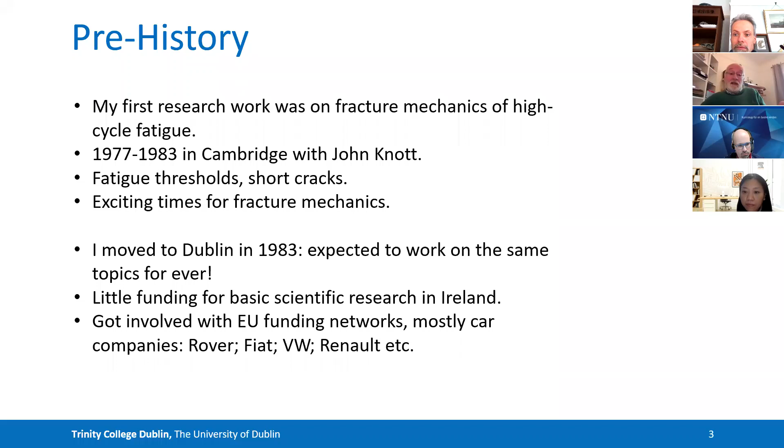I did that at the time simply because it was the only way of getting on, of buying some equipment and getting started in my academic career. But it turned out to be, fortunately, a very good thing, because the big topic those companies were concerned about at the time was notch fatigue, meaning fatigue arising from stress concentration features.

You have a picture of a crankshaft there, for example, a classic problem with cracks growing from the corners. When I first started talking to these companies, they wanted me to study this and understand it better, but it wasn't really expected that we would be able to use finite element analysis. Even when we were applying for funding in the 1980s, we didn't even talk about FEA, because though we were using it in universities, the companies believed it would never be possible to make a finite element model of something like this crankshaft — just too big and too complicated, too many elements.

Of course, we all know that turned out to be wrong, because ten years later, by the 1990s, all the companies were using them. But we could never have known how fast computing would come along.

But when they did start using them, this illustrates the problem: you make a finite element model and you see the contour plot on the left, you've got that little red area, that hot spot. Very often when they first made these finite element models, the stresses they were predicting were so large as to be really impossible — they were calling me up saying, look, we've got stresses here larger than the yield strength, even larger than the UTS of the material sometimes.

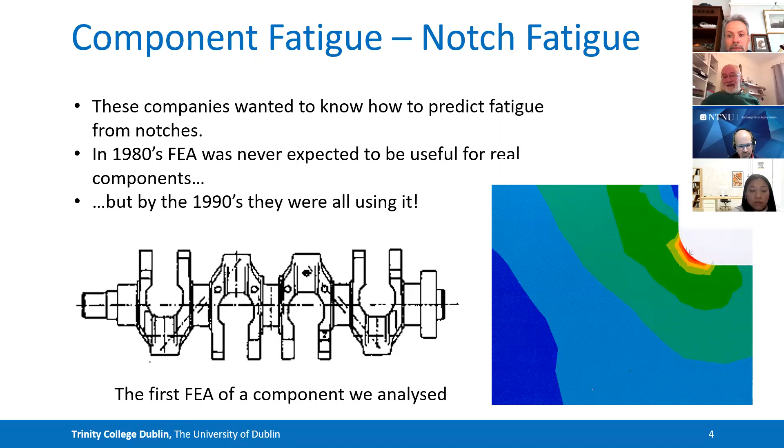So I started working with these companies, and that was very useful because it put me in front of real problems and all the complexities of geometry and loading, which makes the problem much more difficult than that of a simple notched specimen.

You can't even really define a KT factor for a shape like this wishbone you can see on the screen. So there was a need to formulate the problem in a more general way, so it could be attacked from the point of view of post-processing finite element data. Lots and lots of data, of course, from an FEA, but how to interpret that, given that all we know up to now is what happens with notched specimens in the laboratory.

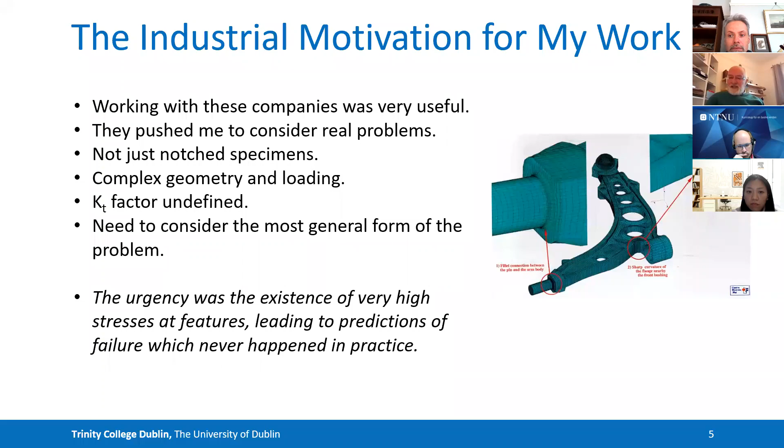There was a great urgency about this, because these companies would love to use finite element analysis, but they didn't trust it, since they were getting these strange hotspot stresses coming up.

Through the 1990s, I was working on these EU network projects. Now, the projects generally were not about notch fatigue. Certainly the money I was getting as a partner in those projects was for doing other things, for example looking at the fatigue of spot welds and things like that. But because it was emerging that notch fatigue was the problem, we took on researchers and did work in that area, even though it wasn't really in the plan, and it was not what the EU were paying for, shall we say.

I also started to get funding from the Irish government. At the time, the Irish government didn't have much money — they only wanted to use it to stimulate industry in the country. Their view was that there were two big things they wanted to encourage: one was IT, computing, and the other was biotechnology. So the only things Irish scientists could apply for money in were those two areas, and I wasn't working in either of those.

Except, I said, all right, this finite element modeling has something to do with it. So I proposed and got funding for quite a few years in the IT stream by saying I was going to develop a computer program to predict fatigue using these notch fatigue ideas. I never did, but I argued that I had to do some practical experiments first in order to get the data to put into the program — and that lasted for quite a long time.

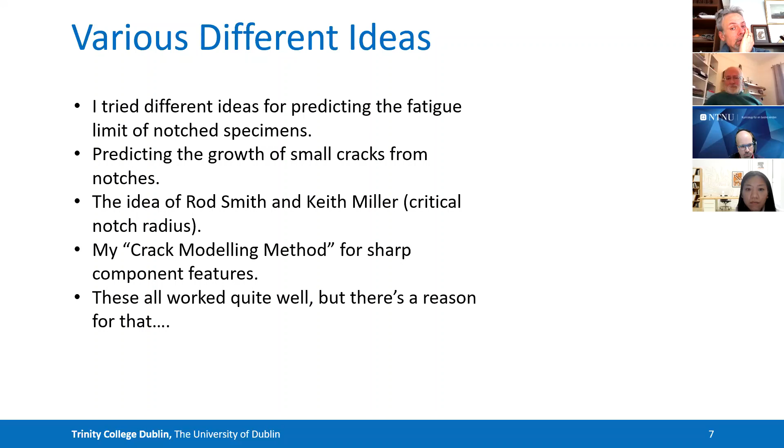But there's a reason for that, and notches are easy. I say that because if your problem is to predict fatigue from a notched specimen - very crudely drawn here by me - the notched specimen only has a few parameters: a depth and a root radius, those are the two main ones. It also has an opening angle, but that only really affects the stresses if the angle is quite large. There's also a remaining section, which is rare - important in some cases, but not often. So really you've only got the depth and the radius.

So it's not too difficult, looking at this cynically, to propose an equation with a couple of constants in it, and fiddle with the equation until it predicts the results from these experiments, because you've only got two variables - depth and radius. So any reasonable theory, any sensible theory that occurs to you, is probably going to work and predict the data reasonably well.

I think we still see this a lot in the literature - people say, 'I have a theory about notch fatigue or notch fracture, here are my results, and I can predict the effect of notch depth or notch radius.' But you have to ask yourself, are you being ambitious enough in what you're trying to predict? You should try to predict a bigger range of stress concentrations, ideally also some real industrial problems, if you want to show your idea works.

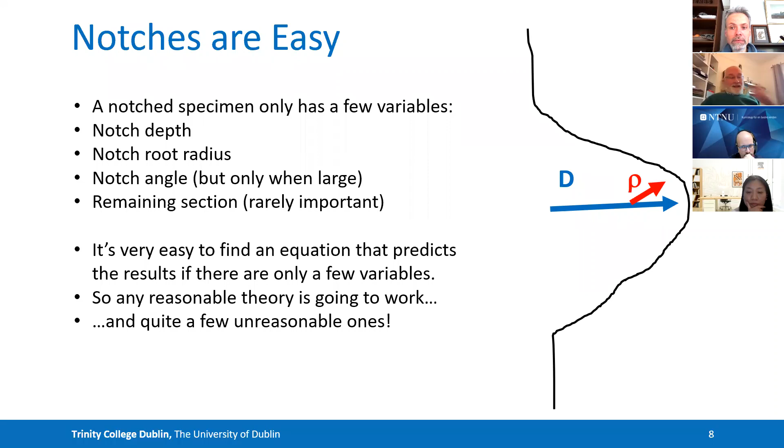Going on to the first paper I wrote about the TCD - I wasn't calling it TCD at the time - this paper was 'Geometrical Effects in Fatigue: A Unifying Theoretical Model.' I actually wanted the first title to be 'A Unified Theoretical Model,' but the reviewers didn't like that - they thought 'unified theory' was too ambitious, so I had to put 'unifying theory.' That shows how you play around with words when arguing with reviewers.

This was my first paper in the International Journal of Fatigue, and it came about because I was playing around with some data I found in the literature - a paper from Tim Topper's group, DuQuesnay et al. This is some of their data on the right, looking at the effect of crack length on fatigue limit - very classic, what we now call Kitagawa diagram stuff.

I noticed that this curved data line could be predicted reasonably well using the stress moving away from the hot spot near the crack, just using the stress at some distance away from the hot spot, which I was calling A0 at the time - we now call it L. Noticing that at half of that distance, A0 over 2, if you look at the stress at that point and let it equal the fatigue limit of the material, you can immediately plot this data. You have to remember to use the full and proper equation for the crack, the Westergaard equation. But if you do that, it works. There are a few other ways of doing it too - averaging the stress over a larger distance, 2A0, or looking at the stress averaged over that area I've drawn there.

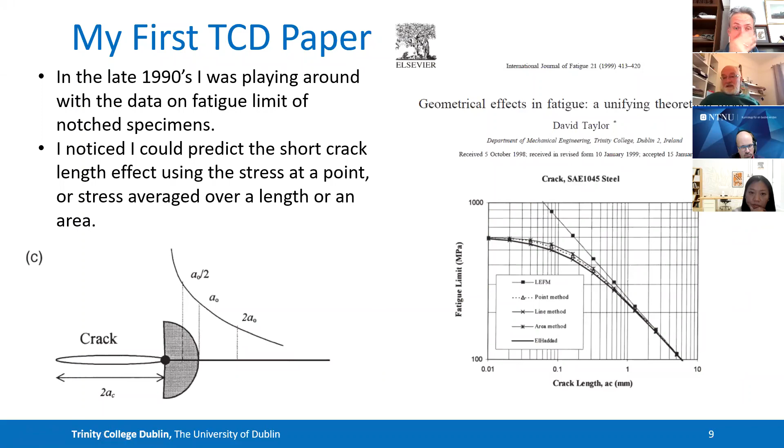But anyway, I played around with this and thought, well, this is nice. This seems to predict these results quite accurately. But that was just for short cracks.

And I noticed also that constant A0 is the same constant as that group was proposing, and they were calling it El-Haddad's method. There was another paper by El-Haddad, Smith, and Topper at the time, where they had made predictions by introducing an imaginary crack, and the length of that crack was also A0. So in my mind, things were kind of tying up.

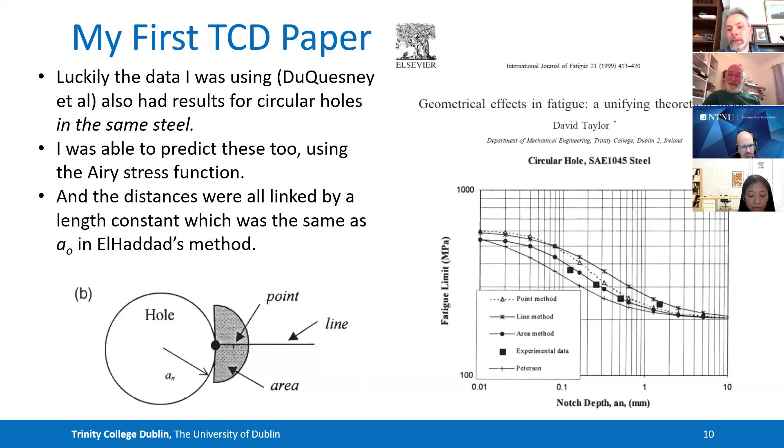You get to a point where you say, this can't be a coincidence, there must be something fundamentally going on underneath all this that makes these different methods of prediction all be working.

Now, it was quite difficult to get that paper published, I must admit. I thought it was a good paper, and I was submitting it to several good journals, but the journals were rejecting it. Some of the reviewers were saying, oh, this stuff is all very obvious and well known, and I'll come back to that in a minute, but they weren't actually quoting me any previous papers that had done this same thing, but they were saying, oh, it's all obvious.

Whereas other reviewers were saying it was all wrong and theoretically incorrect and couldn't possibly work. Two very conflicting views, you might think, and sometimes I got those two views from two reviewers from the same journal, so obviously something strange going on there.

But anyway, eventually I did get it published, and thank you to the International Journal of Fatigue for publishing it. But I think I have the last laugh, because I just checked recently, and that paper has 494 citations to it, which is actually the 6th highest for any paper ever published in the International Journal of Fatigue. So in the whole history of that journal, it's the 6th best paper that they've ever published. So thank you for that.

But I think we all have those experiences sometimes, some work that we know is good, but we just find it difficult to convince others. But it's worth pursuing it and sending it to more and more journals until you get it out there, I think.

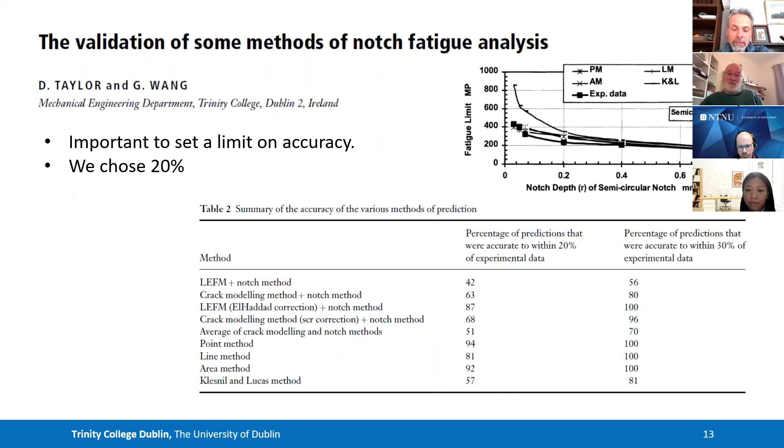So that was our first attempt to really be systematic, look at all the data we could possibly find and ignore nothing, and try and predict everything. And it was working pretty well.

But it was a nice illustration about why you need a critical distance approach, or some kind of approach that's, as we say, non-local, that doesn't just look at the hotspot stress. Because not only can you get the numbers wrong, you can even predict the wrong place for failure.

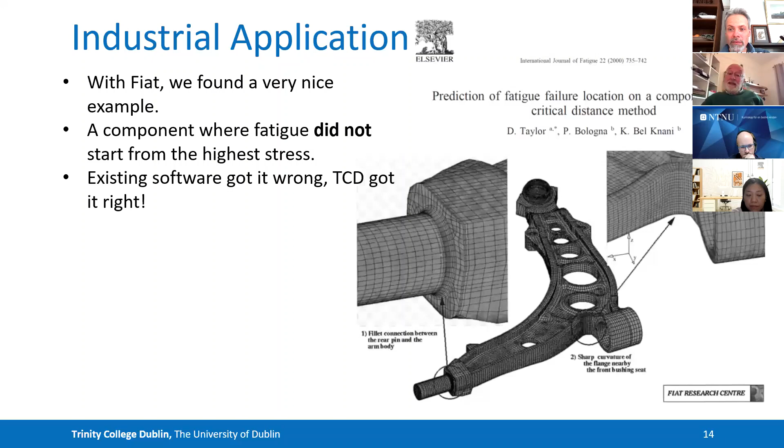So that was a nice practical example. The other thing we were working on, apart from looking at data and trying to predict it, looking at industrial problems and trying to predict those, the other strand was to try and look at the mechanism.

This is another fundamental thing about science: if you have a theory, you may well be able to predict the phenomena with that theory without really understanding why it works. These purely phenomenological models are very common, and we use them in science and engineering all the time. We use Young's modulus to predict the stress from the strain, or the strain from the stress, without worrying too much about why stress and strain are proportional. Maybe we know the science, and you could go back to the fundamental mechanism of atomic bonding, but you don't—you just plug it into the equation. There are lots of equations like that we use.

But people are more comfortable with a theory, with a model, especially if it's a new one, if they can understand why it works in terms of the underlying physical mechanisms. Now, to be honest, this has always been a problem with the TCD theory—it's not easy to explain why it works and why such a simple theory works. But I started doing that in 2001, and we've been plugging away at that ever since.

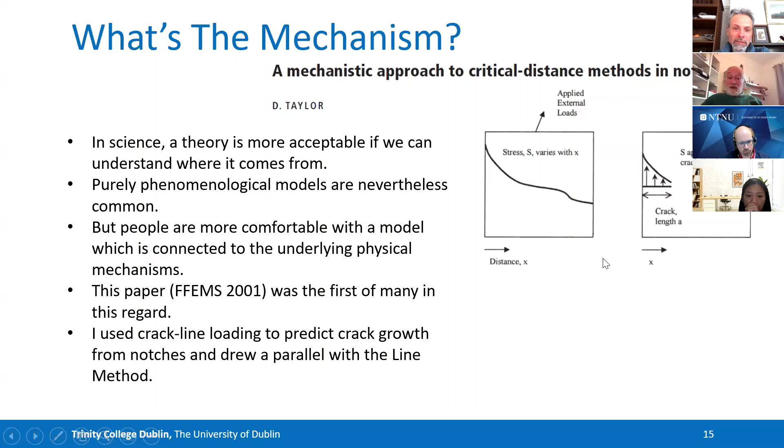This particular paper, published in the Fatigue and Fracture of Engineering Materials and Structures journal, used that method you may be familiar with called crack line loading for predicting stress intensities of cracks. The argument is you have a body with a stress in it, and you want to know if a crack's going to go through it. If you put a crack in, you can predict the stress intensity of that crack by looking at the loads applied across it, or making an analogy between the actual external applied loads and a series of point loads representing that stress gradient. By doing that, I could make an analogy between that and the line average method of the critical distance theory. We won't go into the details, but we were starting to ask ourselves: why does this work?

Okay, going on to the next slide. So where are we so far in the story? It's now 2001. I've been working on this critical distance idea for about 3-4 years. I've had an idea, I've shown that it predicts a lot of data, that it has some industrial applications, and maybe can be linked to physical mechanisms.

Now, what I didn't know at that point was this had all been done before. Many of you are familiar with the fact that these ideas like the point method and the line method go way back to the 1930s when Neuber and Peterson were proposing them. It had been looked at by several people in the Italian group, such as Bruno Atzori's group and Roberto Tovo. These papers are there in the literature. Professor Tanaka in Japan made the same link as I did between the stress averaging methods and the linear elastic fracture mechanics methods. So it's all kind of there.

Now, I'm not going to start talking about what I did that was new and different—I'll leave that to you to decide what I did versus what other people did. But the moral of the story for me is: don't read the literature. Because if I'd been very careful and read the literature and informed myself about what was already being done in all these papers, I probably would never have continued down this road, because I would have said, oh, this has all been done before, we won't go there. So don't read the literature is the advice I give to my research students. Anyway, you can take that or leave it.

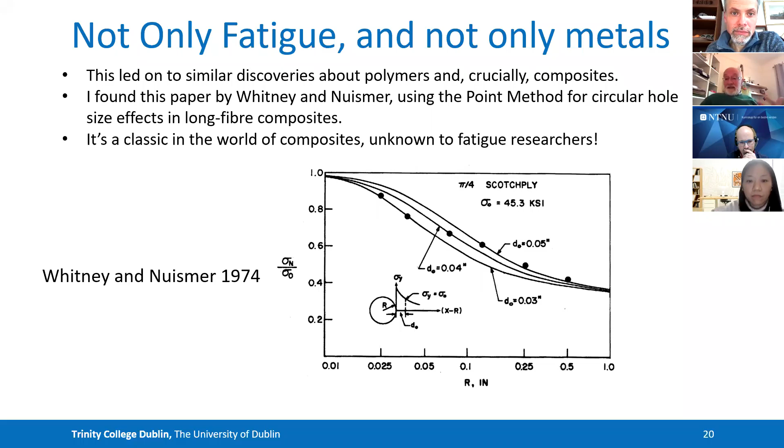This is a classic paper in the world of composites, but I didn't know about it, and I think most people working on metal fatigue wouldn't have known about it. It shows that we all live in our own little worlds. We go to our own specialist conferences, our own sessions in big conferences, we read our own literature. Sometimes we don't realize that the same exact theory is going down parallel lines in two different worlds - in this case, fatigue versus fracture, and metals versus composites.

So it was very exciting for me to discover the strands of this same idea in quite different areas. For me, it was philosophically a big question about self-perception and what kind of scientist I saw myself as. Looking back, it's amazing to me that between 1981, when I started publishing, and 2003, when I was already an associate professor in Trinity College, I published 78 journal papers, but they were all about fatigue.

Quite wide - I mean, I was working on fatigue of medical materials and bones and other things, not just metals, but they were all about fatigue, because I kind of saw myself as the fatigue guy. Fatigue is what I know about - that's what I'm confident in writing papers and publishing about.

So it was quite a big step for me, quite a scary step, to submit a paper in 2004 to a ceramics journal talking about fracture of ceramics, something I didn't regard myself as an expert in. I think it's an important step for anybody to realize, to have the confidence to go into other fields and learn as much as you need to know about that field - not necessarily becoming an expert, but at least knowing enough to confidently say I have something to say about this field.

Now, the ceramics journals rejected the paper, and again, this was a paper I found quite difficult to publish. At the time - I'm not sure if it's still true - the prevailing view amongst ceramics people in relation to fracture was that all cracks in ceramics are Griffith cracks, as they would say. All cracks conform to LEFM, and there's no such thing as a small crack in the way we think of it in fatigue.

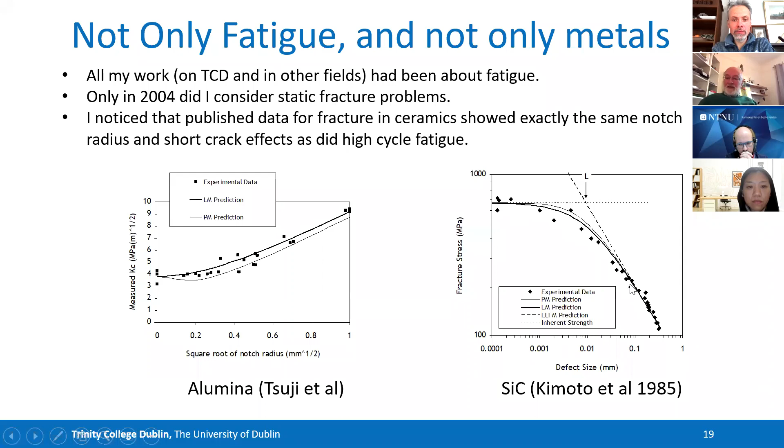So what I was saying was different from that. I was saying, going back to this graph, look, these small cracks here - some of them are so small that they don't affect the strength. Others don't conform to LEFM; you have to get above a critical crack size before they conform to LEFM. And many reviewers in those journals just wouldn't accept that idea, because it seemed to be a fundamental tenet for them. So I eventually published that one in Engineering Fracture Mechanics, one of the fracture mechanics journals.

Anyway, so it was a period, you know, very exciting for me when you have a theory, an idea, and you're looking around in the literature and finding again and again the same theory can work for very, very different problems, not just fracture of metals, but contact problems, for example, fretting fatigue problems. And so it was a great period. I was publishing quite a lot, and finding, you know, one day I might be working on fracture of a polymer, another day looking at a problem of fretting fatigue, very different types of problems, and yet the same quite simple theory being applied and getting the right answer. So it's very exciting in any branch of science when a theoretical model is shown to be solving a big range of different problems.

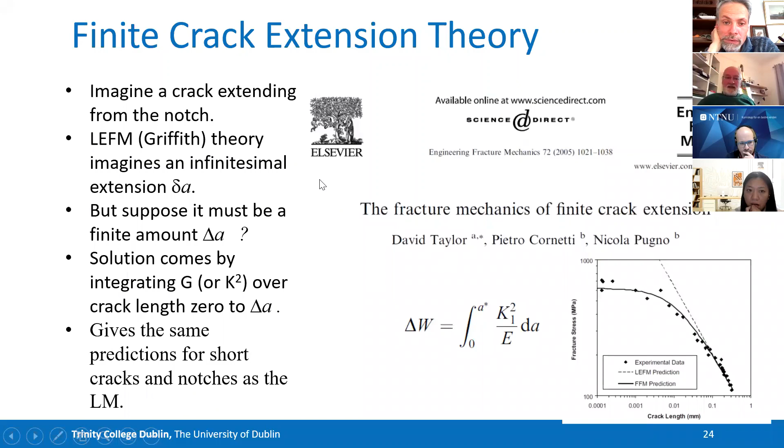Anyway, moving on, because I'm taking too long. The name of the TCD didn't come about until 2006. We'd been calling it various things until then. But I realized that there are a whole load of theories, mine and others, in the literature, like the point method, the line method, the imaginary crack method of El-Haddad, this finite crack extension theory that we just came up with. And they all basically use the same length constant, but in different ways, and they all give similar, though not identical, predictions.

So I propose this name theory of critical distances, with distances being in the plural, to bring together all those different methods and say these are really just manifestations of the same method. Also, TCD is handy because it's the acronym of my own university, Trinity College Dublin. So that was a bit of publicity as well.

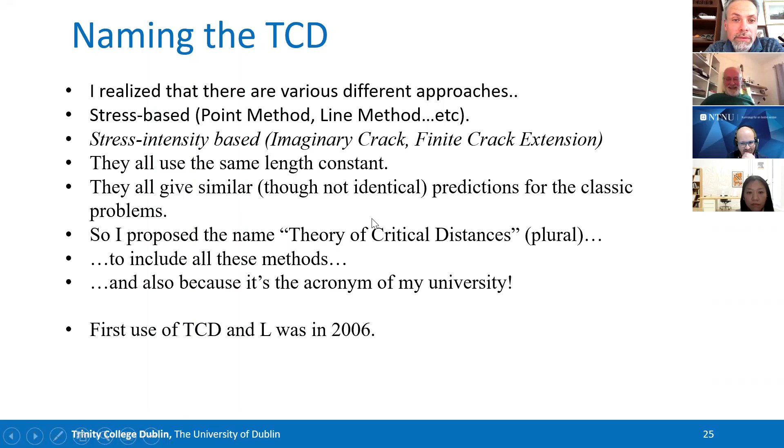It's not the only TCD. If you look around, TCD stands for a lot of things. It stands for telecache dispenser, target completion date, transcranial Doppler imaging. And my favorite is talker change detection. What is talker change detection? It's how you know that you're not talking to a robot. Okay, something that I think we would all like to know.

But anyway, there are lots of TCD, so there's no point in searching literature for TCD. You have to be a bit cleverer than that.

I wrote the book in 2007 as a way of getting together all these 50 or 60 papers that I'd written by then, and making a statement about what I know about this. I think books are very useful, and I think it's a pity these days that not so many of us, not so many scientists and engineers and academics are writing books. I think the main reason for that is that we don't get credit for them. Universities like us to publish papers in high impact factor journals, and of course we should, but a paper has a certain length, and sometimes it's just not enough to capture a whole field.

People in industry like books. People who are starting out on a field of research like a book. But I think we need to find ways of incentivizing people to get their heads down and do the work to write books. But anyway, I also wrote it to kind of draw a line under my work and at least slow down rather than stop working on the TCD and spend more time working on other things.

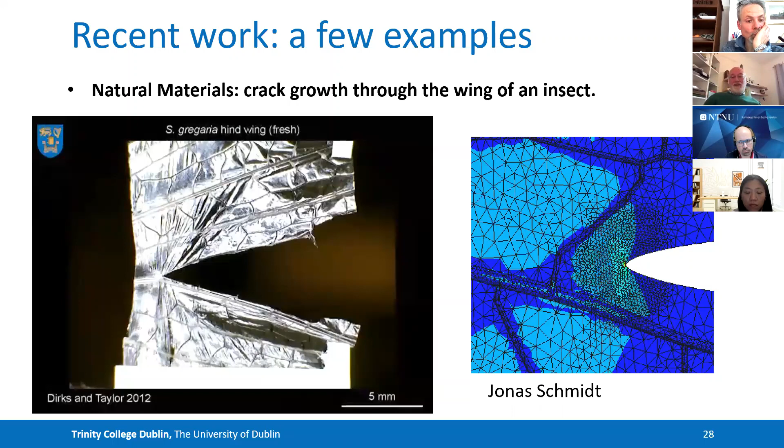But I have carried on doing work on the TCD, and just a few quick examples. This is a test where we are passing a crack through the wing of an insect, and you can see the crack hitting the veins of the wing there and passing through it and being interrupted. And that's a classic example of that finite crack extension that I was talking about. We made a finite element model of that. My researcher, Jonas Schmidt, showed that the TCD could be used very nicely to predict the experimental results in that rather weird example, and we've used it for quite a lot of different natural biological materials.

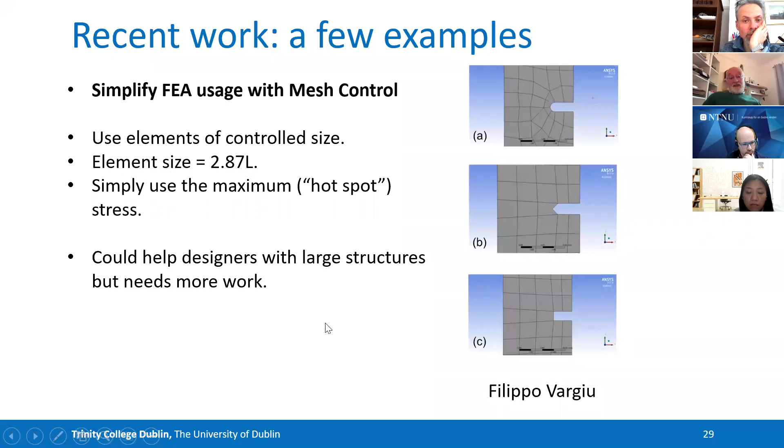Trying to find easier ways to make it easier for use in industry, where sometimes you don't want to make a very fine mesh to capture the stresses near a notch. Looking at this idea we call mesh control, which is to have quite a coarse mesh, but one with constant element size. You have to trick the program a little bit to do that. But it turns out that if you do that, you can often get good results just using the hotspot stress if you control the element size as a function of L, about 3 times L actually. So it's kind of like averaging over distance similar to the critical distance. And this may make it easier for industrial designers looking at large and complex structures.

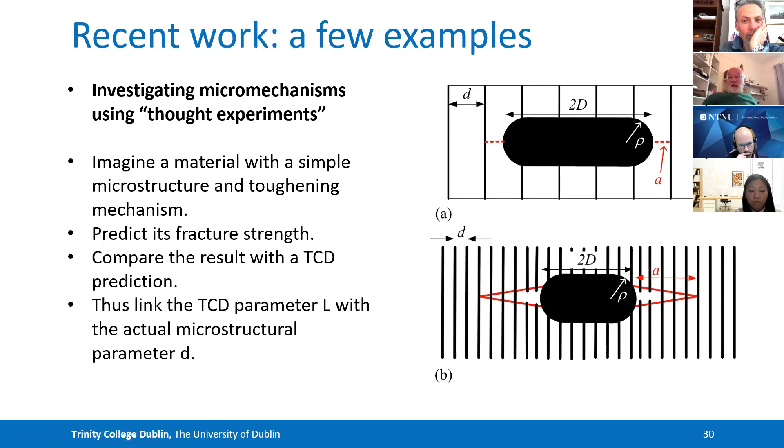And one paper published last year in the TAFMEC journal, I imagined actually two different mechanisms operating at two different scales, because we often find this in materials that they have maybe grains and also fibers or other mechanisms operating simultaneously. And so on the left, we've got the theoretical predictions from those simple models I just showed. But here we've got actual experimental data.

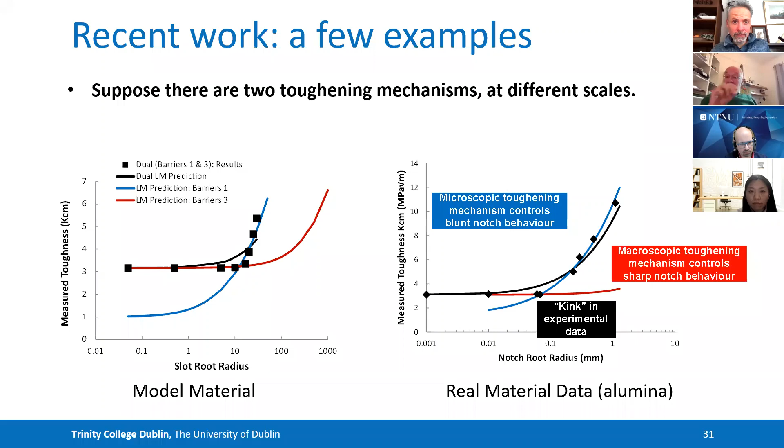There's also been a lot of work going on by other people, some of whom are kind enough to cite my work. Last year, because it marked 20 years since my first paper, I had a look in the literature with a plan of writing a review article about all the papers mentioning the theory of critical distances. But that was just impossible because there were hundreds and hundreds of them, and I couldn't even read them all. But I did mention some in a talk I gave last year at that virtual ECF conference that Francesco Iacovello and colleagues organized.

Thank you very much, guys. I was gratified to see that there were many people citing my work, but taking it on in very different and exciting ways. Here's a few of the more exotic examples.

This is a nanoscale silicon, single crystal silicon, very small specimen tested in an electron microscope where the critical distance is of the order of 1 nanometer, but the TCD theory works.

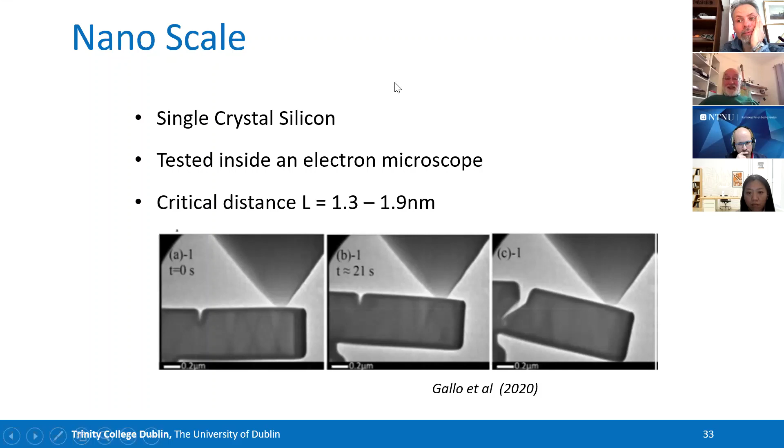This is the opposite, very large scale civil engineering structures. I've seen quite a few papers where people are looking at bridges and buildings. Luca and others have been working on concrete, for example, and it works up there as well.

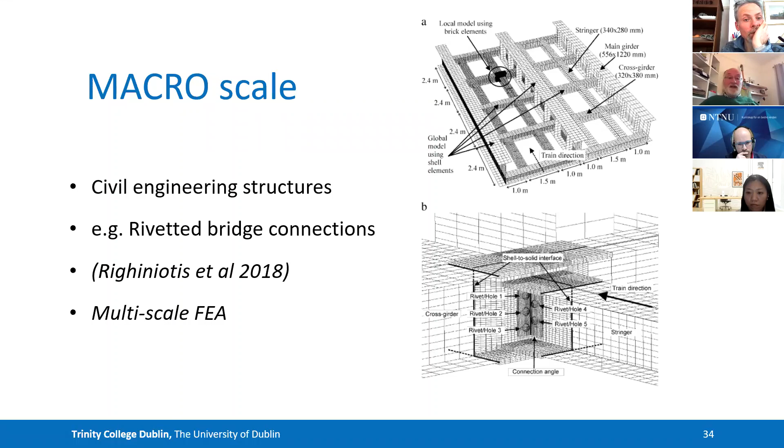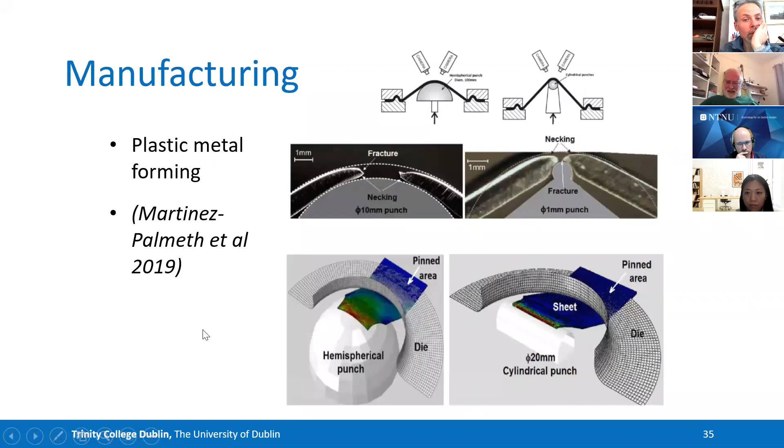And even using it in situations that I wouldn't have imagined it could work, which is high plasticity manufacturing operations, plastic forming operations, where these researchers are predicting fracture during a forming operation with a lot of plasticity, again using critical distance concepts. So there are a lot of potential applications.

Last few slides, there are certainly problem areas remaining, so plenty more work for people to do. There's a problem if the body you're analyzing has a finite size, so that the remaining ligament gets to be similar to the critical distance.

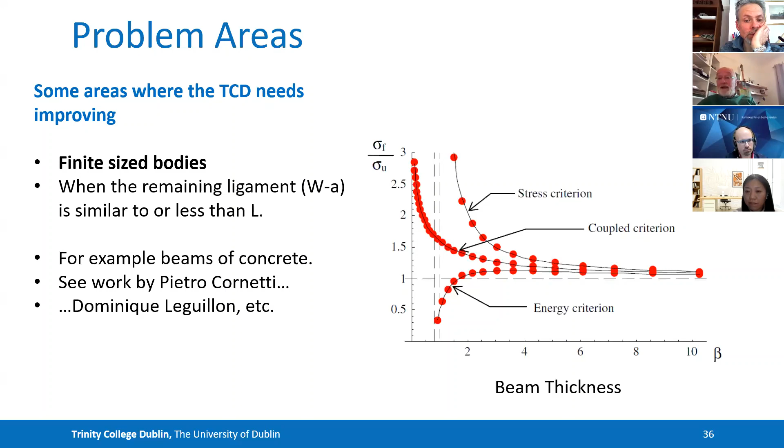This is something that Pietro Cornetti and others, such as Dominique Leguillon, have looked at and proposed these so-called coupled criteria, which overcome that problem. They call that finite fracture mechanics, and there are a lot of nice examples of that.

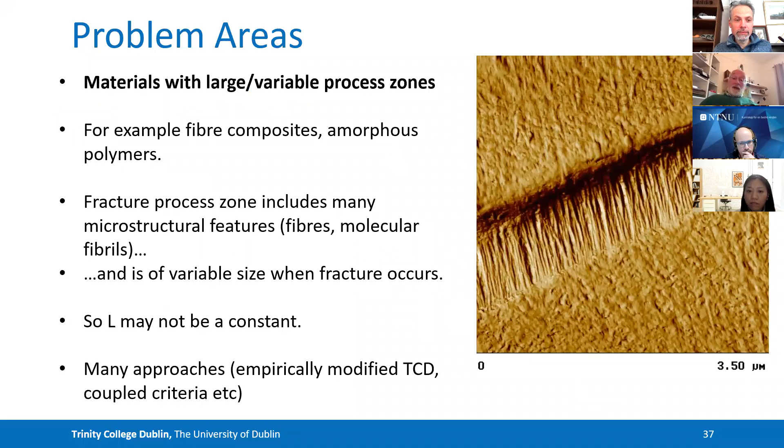There are problems in materials that have large process zones. In some materials, the process zone is similar in size to the microstructure, like the grain size, but in others it's much larger, where a lot of microstructural elements are involved. In those cases, a constant critical distance may not always work. Again, these coupled criteria are one way of getting around that. There's certainly more to do there.

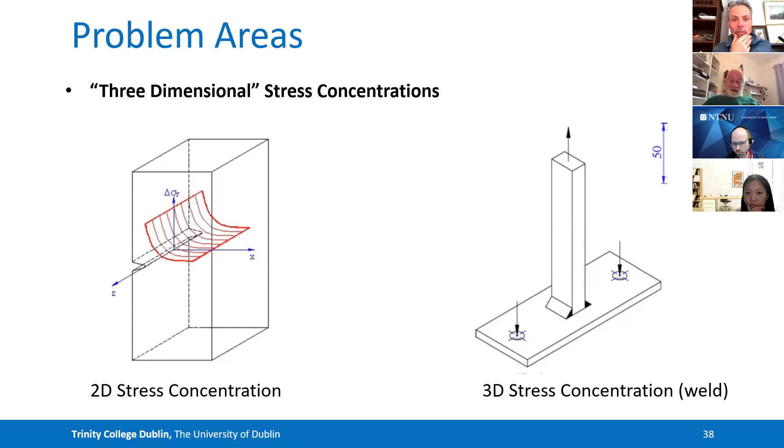When we tried to use the TCD for those, we always found it was very conservative, giving very conservative predictions. The only theory I've seen that works for those kinds of problems is one that Roberto Tovo came up with, the implicit gradient theory, I think it's called. He was kind enough to include me on one of his papers because they analyzed some of the same specimens we've been analyzing and got good predictions. So that's certainly one that needs returning to, I believe.